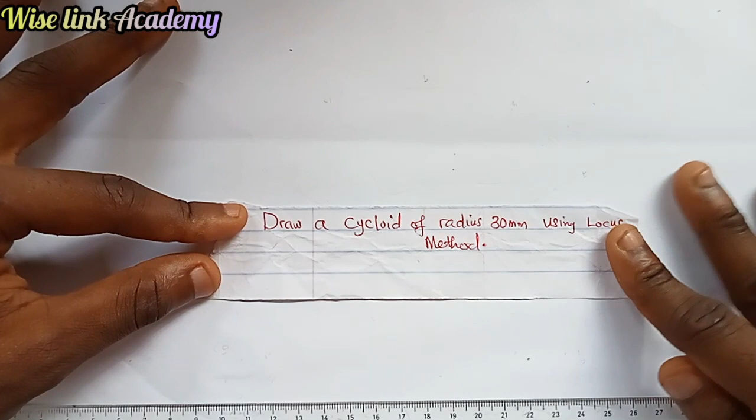Today in our channel, we're going to be drawing a cycloid. So a question is given below. Let's say it said draw a cycloid of radius 30 millimeter using locus method. Now let's do that. The first thing to do whenever you see a cycloid question is to draw out your horizontal and vertical line. So let's do that.

So you draw your horizontal line. You can see my horizontal line. So the next thing to do is what? You draw your vertical line, picking any point in this straight line. So let's pick this point. I wish to draw my own here. You draw the vertical line upward. As you can see, this is my center point.

So the next thing to do is to draw out your radius 30, because in the question, if you observe very well, you are having radius 30 millimeter. So measuring 30 millimeter with our compass, from here to here is our 30. At the center point, you draw the circle of radius 30 millimeter.

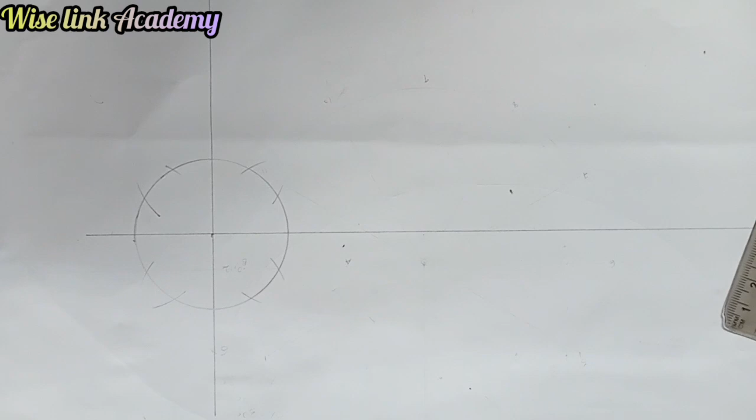So the next thing to do is to join these arcs together. Doing that with my rule, I'll be having something of this nature. Connect this point and the other arc together. Join this and this. You join the next one, this to this. Join this to this, and join this and this together.

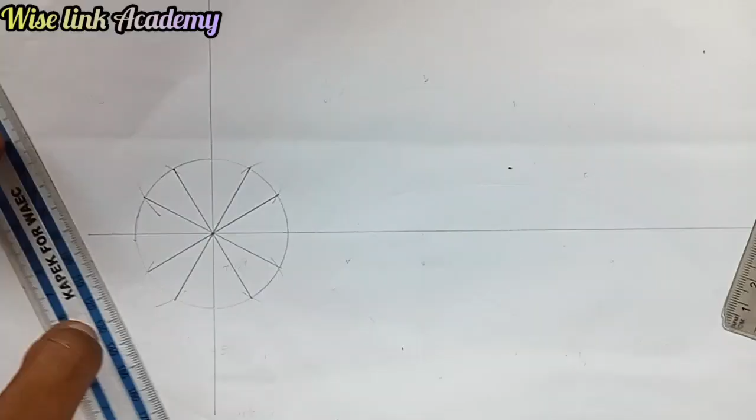So if you count this, it is already 12. So here will be 1, 2, 3, 4, 5, 6, 7, 8, 9, 10, 11, and 12. After numbering it, the next thing to do is to project the line.

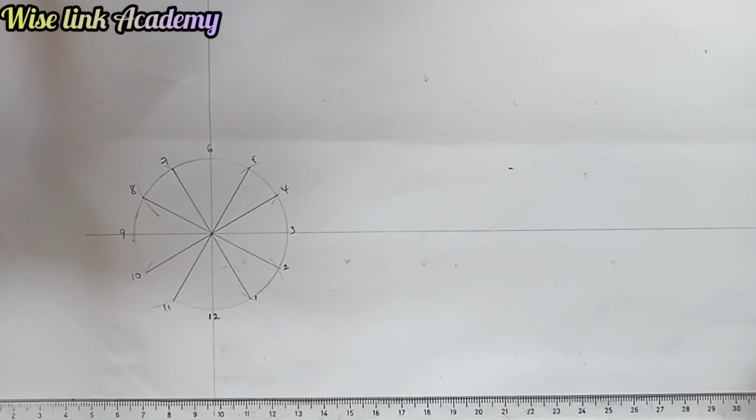Draw a horizontal line such that the horizontal line will be tangential to this bottom, isn't it? So let's do that first. You join this bottom here in a horizontal line, as you can see. Joining the upper one, you'll be having this. Let me show you what I'm having very well.

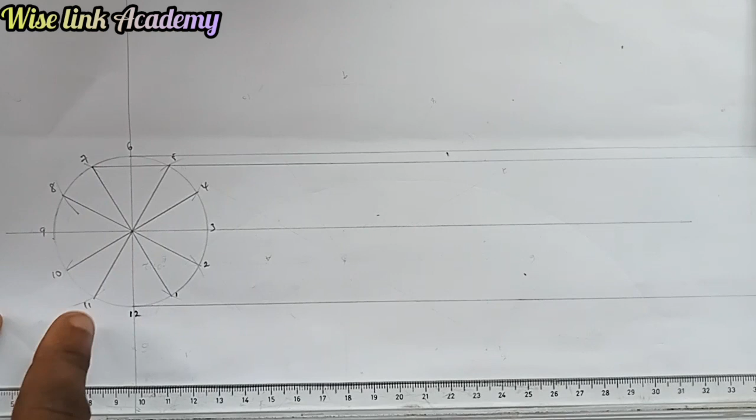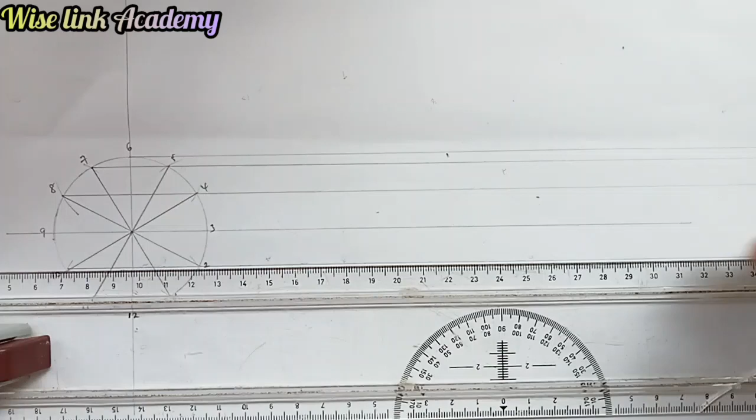So the next thing to do is to join 7 and 5 together. So we have joined our 7 and 5 with the horizontal line. Join your 8 and 4. You join the edge of 8 and 4. You'll be having something like this. So joining 11 and 1, you'll be having this. So joining 10 and 2, you'll be having something of this nature.

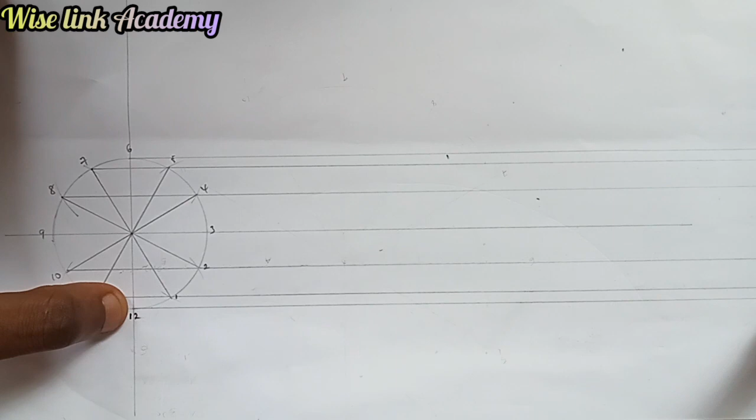So the next procedure is for you to divide this bottom line. And what do you observe? You observe that these lines are 7. Let's count it: 1, 2, 3, 4, 5, 6, 7. We are going to be using this line for our cycloid. It's very important. So the next thing to do is divide this bottom line into 12 equal parts.

So I have shown you guys how to divide a line. If you want to check that, you can just go back to my channel and check how to divide a line. But I can also divide this using another method of my choice. So look at that method now.

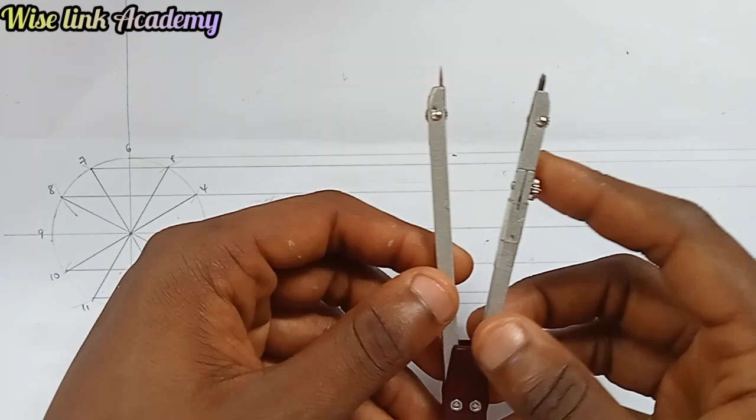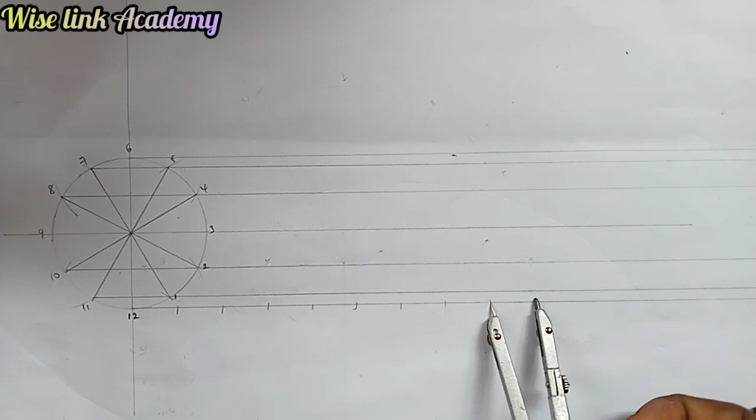You take your compass pin at this point 12, and measure the radius to that 1. That measurement you step along to 12: 1, 2, 3, 4, 5, 6, 7, 8, 9, 10, 11, 12.

Let's see: 1, 2, 3, 4, 5, 6, 7, 8, 9, 10, 11, 12. So numbering it, you'll be having 1, 2, 3, 4, 5, 6, 7, 8, 9, 10, 11, and my 12.

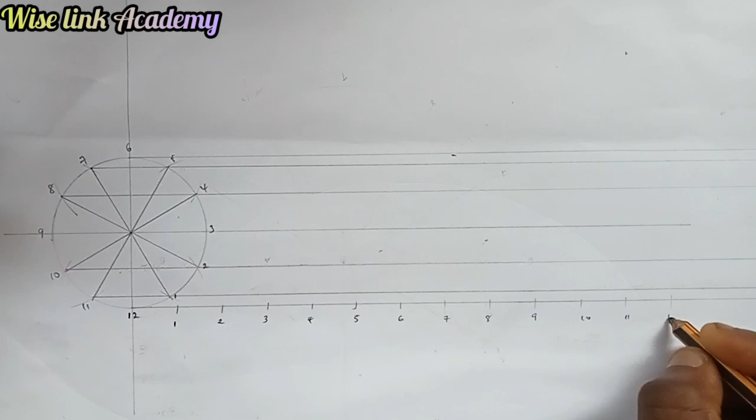So this line you have drawn must be equal to each other. So let's put this one. It needs to be extended. I've extended it. So the next thing to do is what? Take your set square. This one. Take this one. Set square at point 1. This is my point 1. At your point 1, a vertical line upward.

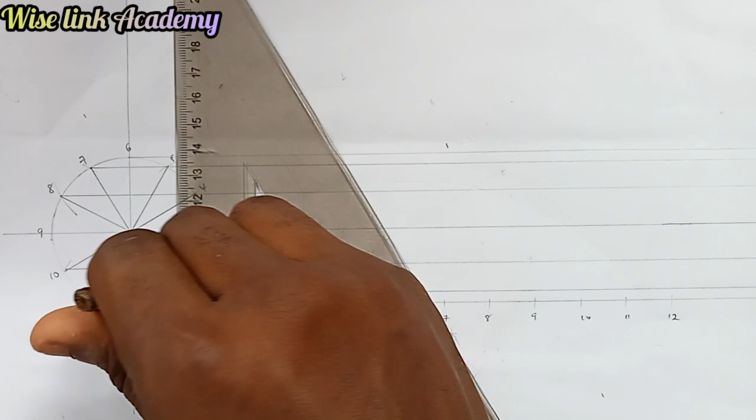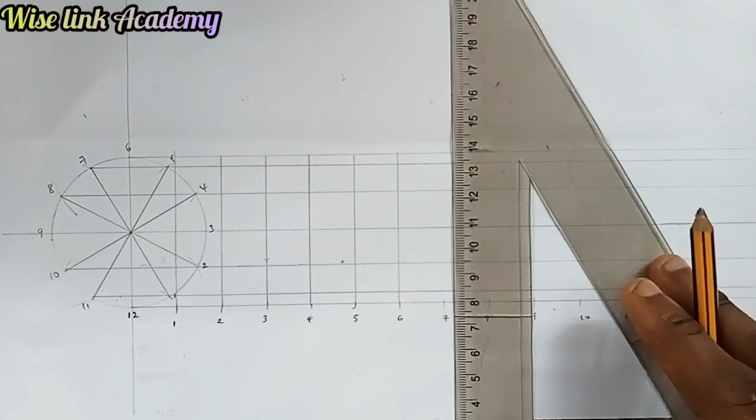At point 2, a vertical line upward. At point 3, vertical line upward. At point 4, vertical line upward. At point 5, vertical line upward. Point 6, upward. Point 7, upward. Point 8, upward. Point 9, upward. Point 10, upward. Point 11, upward, and point 12.

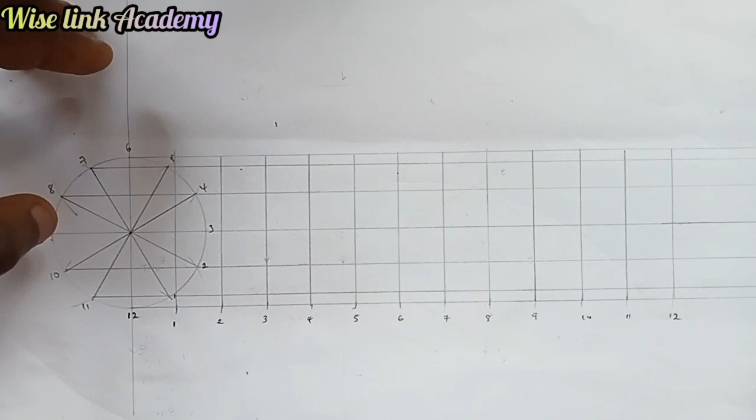So this is my point 12. Now after projecting this line upward, the next thing to do is to start the next procedure, which is drawing our circle. What did I mean? I meant that you take a pair of compasses to where this circle ends, to the middle, which will give us 30, isn't it? Before you start, this is 30 degrees, isn't it? After measuring 30, let's label it. This is 30, you place it aside.

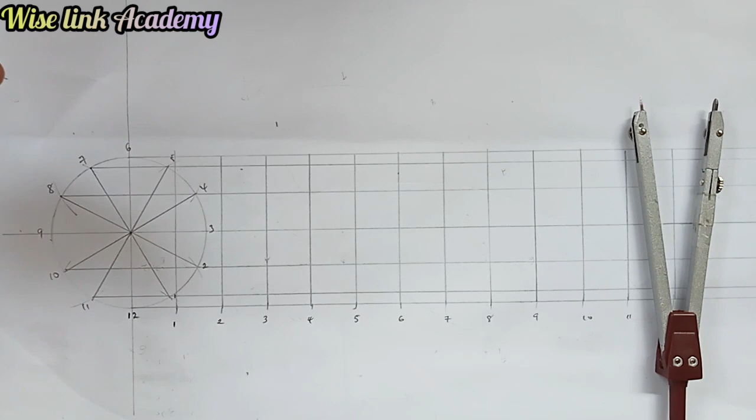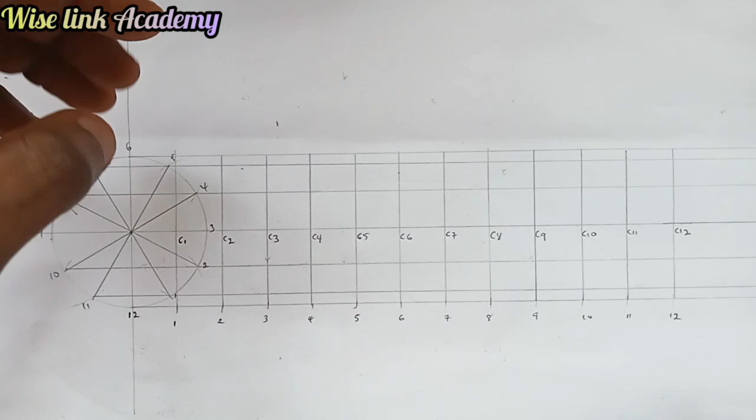As you can see, you now take your pencil, you call this point 0, isn't it? Your 1 is our C1, your 2 will be C2, here will be C3, here will be C4, here will be C5, here will be C6, C7, C8, C9, C10, C11, and finally C12. After I successfully do this, you take a pair of compasses, don't shake it.

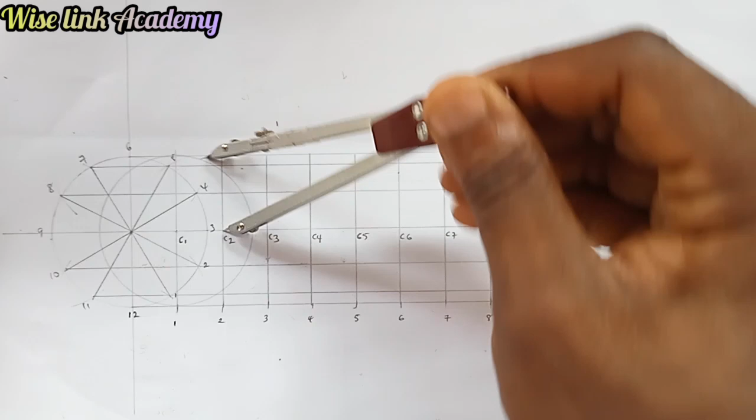Maintain that from this point to this point, you can see. So you now take it to point C1, you draw a circle. As you can see my circle, take it to point C2. As you can see, with the same radius, don't shake it. Take it to point C3. Point C3, draw it very well.

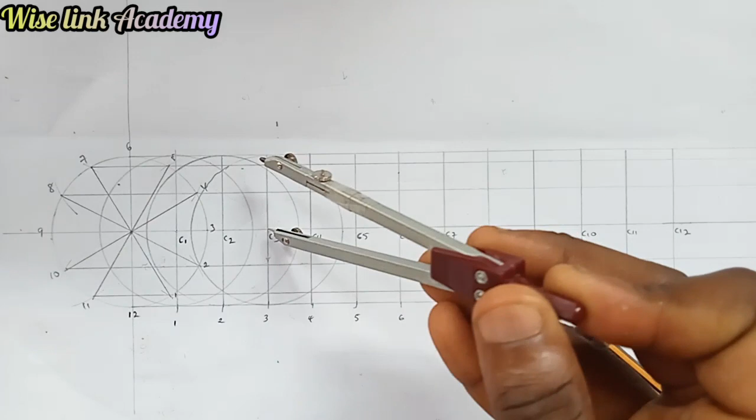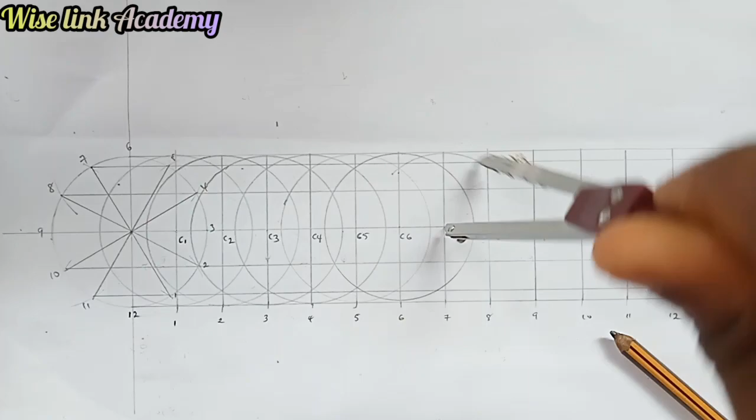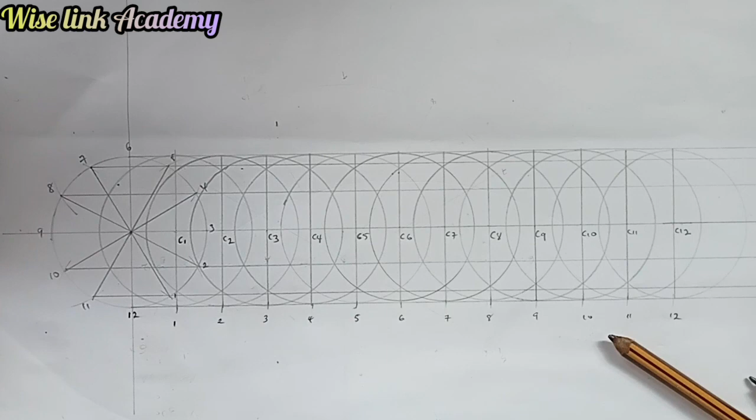Yes. Point C4. Point C5. Point C6. Point C7. Point C8. Point C9. So that's what I'm doing. Point C10. Point C11. And finally point C12. We're having this, isn't it? Let me show you that ending point of point C12. So this is our ending point.

So the next thing to do is you start taking our readings. How do we do that? The next procedure looks like as if you are plotting a graph, but it's a very simple basic concept. This is how you do it. You see this circle is for C1, isn't it? So where that point one circle meets the first horizontal line.

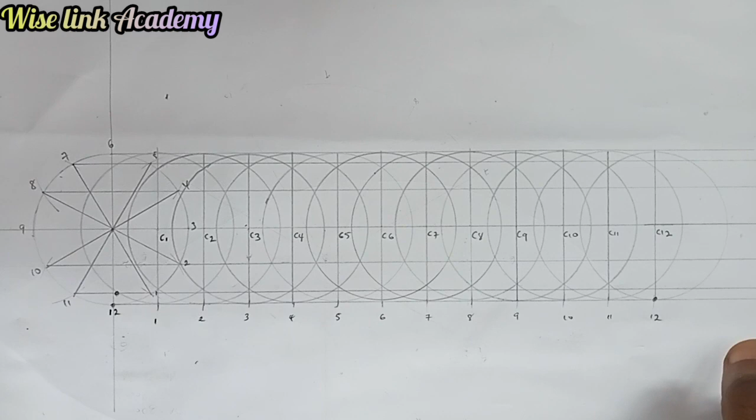You know we have the same horizontal lines. This is the first one. This is 1, 2, 3, 4, 5, 6, 7, as we said earlier. So this circle one is meeting this first point. This is the beginning point at its meeting. So this 12 is the ending point. You're taking all those places first. So this one is touching this one. Can you see? The first point is touching.

The next one is 2. 2 is touching this point. Point 2 to point 2 here. Because point 1 to point 1 here, you can see. So point 2 to point 2. So this 3 will touch point 3 to point 3. As you can see. 4. Point 4 to point 4, as you can see. Isn't it? 5. This is my 5. 5 is touching here. You can see.

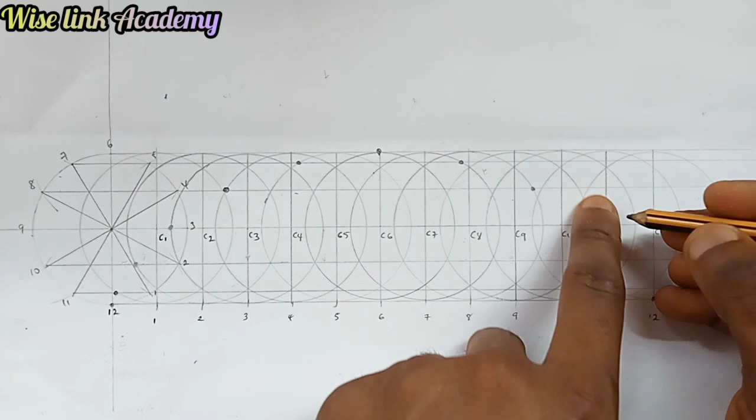6. Take it like this. 6 is up here. So we trace it up. 6 is touching this place. You can see that. 7. Take it like this. 7 is here. 8. 8 falls somewhere here. Look at it. 8 falls somewhere on a straight line here. Taking it up. 9 falls somewhere here at the middle. See 9.

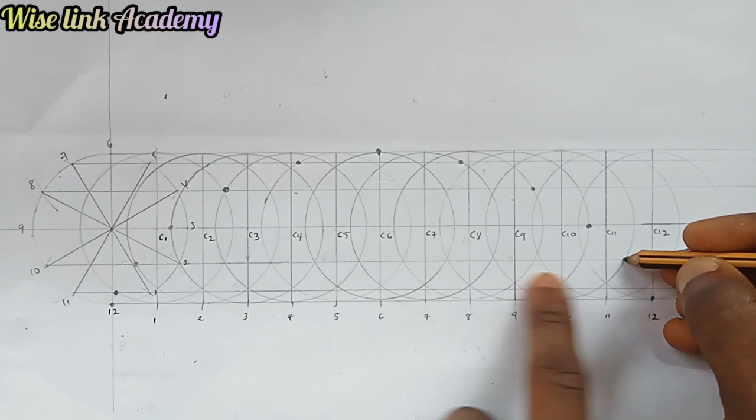Taking this part. 10. Take 10 downward. 10 is falling down. You see 10. It's falling here. 11. Let's see 11. 11 falls somewhere here. You can see. It's my 11. And this is the final 12.

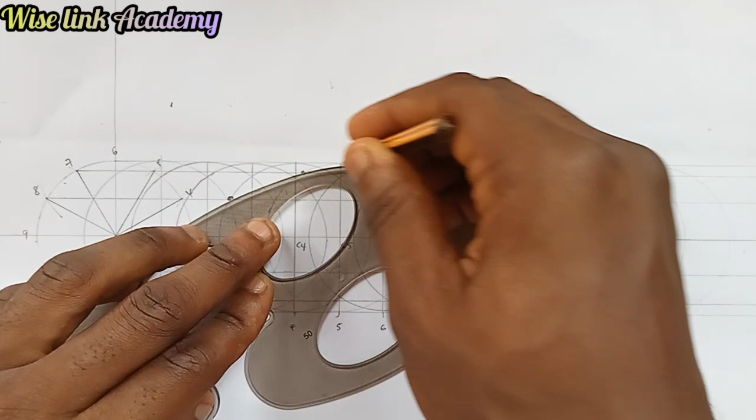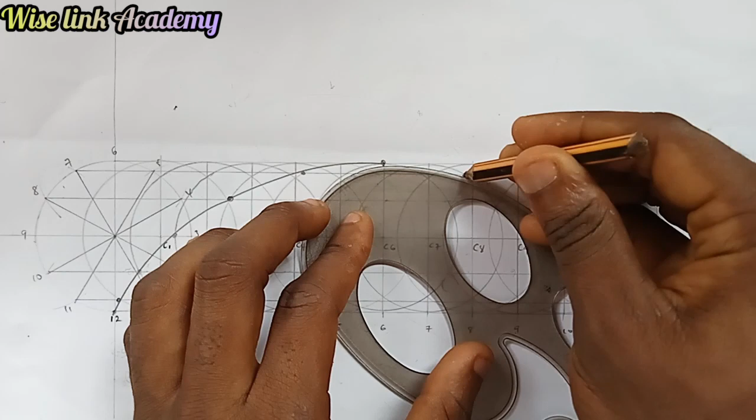So the next thing to do is using our French curve to join those points together. So taking my French curve, setting it, joining this part and this part together, I'll be having this. As you can see. Join this part and this part together. Come to the other side here. Join this to this, as you can see. Take it step by step.